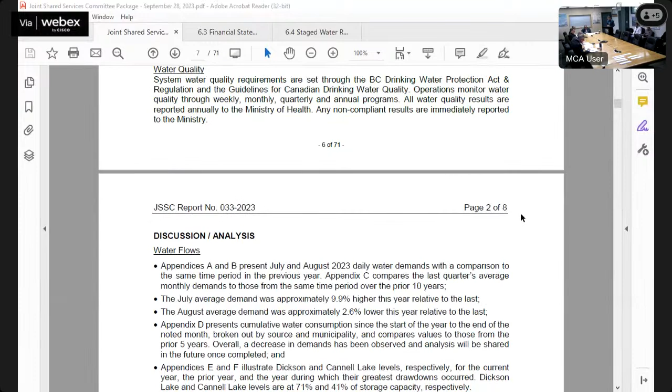Thank you, Chair. I'm pleased to present the bi-monthly water report for July and August of 2023. All water quality results during this period met regulatory requirements for the reporting period. If I could get to scroll down to Appendix A on page 8, that shows the daily demands.

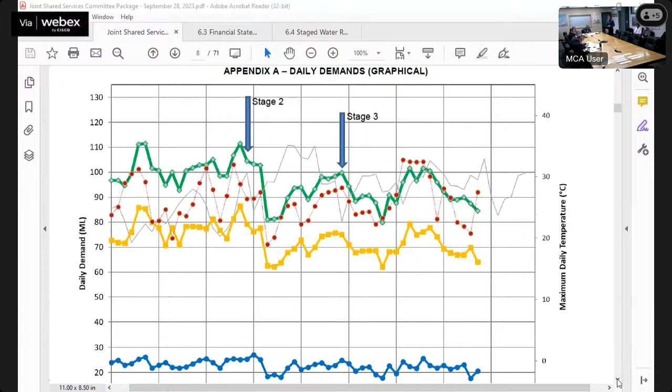We had a peak flow of 111.5 megaliters on July 6th. We also hit that peak on July 20th. You'll notice on the appendix here, I have noted when stage 2 and stage 3 were implemented. You can see some immediate response to those going into place. There will be further information shared with the committee later through Laith when he speaks to that.

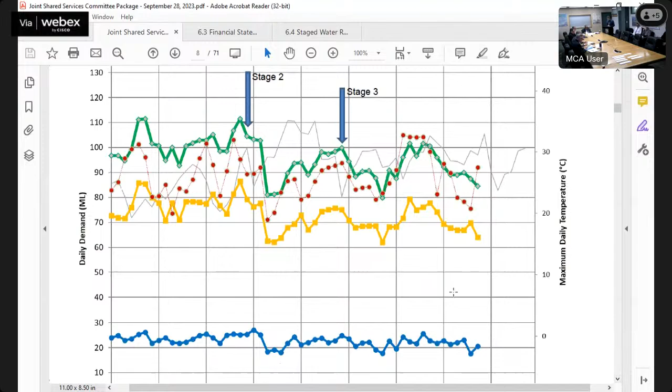Next point would be Appendix C on page 10. This shows the average monthly demands. At the time of this report, July was wrapped up. We were actually up 9.9% in consumption in comparison to the same time last year. August ended up, at the time of this report, down 2.6%.

Just as an update to bring us to where we are today, though, August continued on that downward trend and ended up at 4.6% lower in comparison to the same time last year. And at the date of this report in September, we were actually down by 10.5% in comparison.

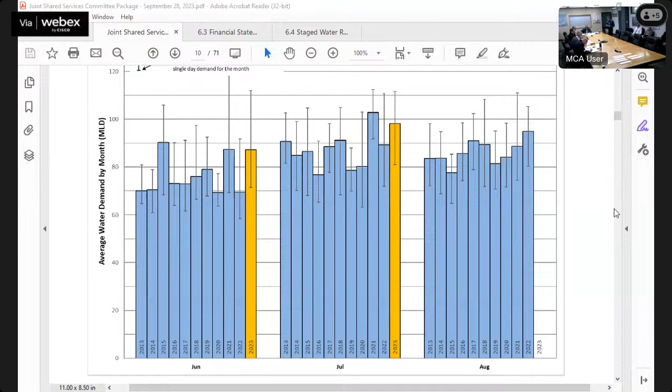Next points of interest would be Appendix E and F on page 12 and 13. This gets us to the lake level, so we'll stop here at Dickson. At the time of the report, Dickson was measuring 71% at the spillway. Fast forward to where we are today, Dickson was down to 64%. Now, to put that into some context, that blue line came pretty much right on the dotted line where we would start to need to pump.

The rain came as of Sunday, and as a result of that, we've actually gone up by almost half a meter as far as volume in the lake goes, just over the last rainfalls we've had. So we are starting to see a bit of an upward trend due to the rain. We are optimistic, however, that's only as good as the rains that do come.

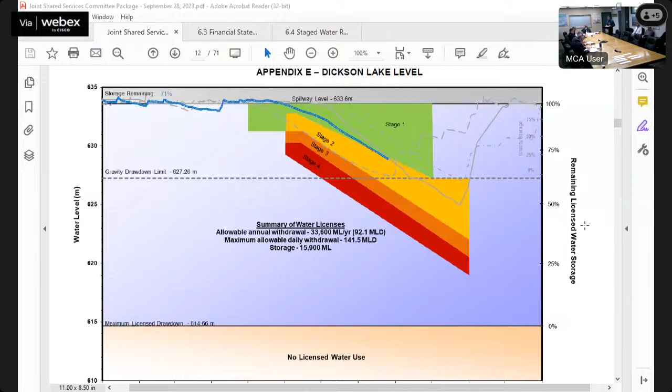The next page, if we go down to Appendix F, that is Cannell. And at the time, it was at 41%. Fast forward to this morning, we were at 31%. We still have quite a bit before we'd have to pump there, and we're actually seeing a flattening curve of the line. The rain is helping, but also we're seeing less consumption for that area of Mission that is supplied by Cannell specifically. And that does conclude the report.

If there's any questions, I'm happy to speak to them. Thank you. Are there any questions? Go ahead, Councilor Gibson.

In terms of conservation, what is the proportions, consistent proportions between commercial and industrial use and residential use?

Through the chair to the councillor, I don't have that information. I know Laith, when he speaks to his report, there is some discussion on that. I believe that might have been in his report as well. That information is available to us for Abbotsford. I'm sure Mission is able to pull that as well, but we're still doing the analysis on that.

Through you, Chair, the reason I'm asking is we're big on conservation, but we're constrained because a number of our industrial sectors are not able to conserve because of the nature of their business and the way they're processing whatever they're doing. So it'd be interesting to look at that paradigm and see what other ways we can conserve without compromising our industrial sector, I guess that's why I'm asking.

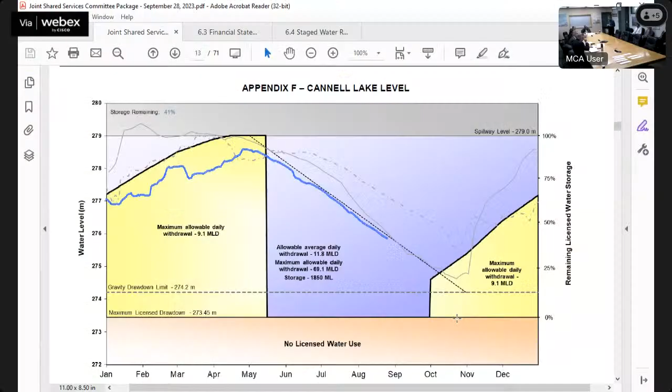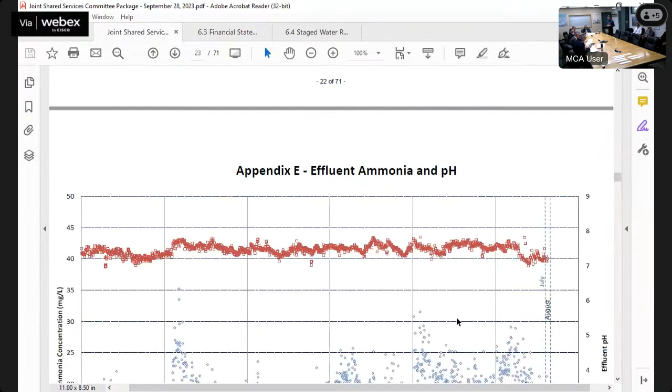We'll go to the bi-monthly James plant report, with Jimmy Austin presenting. Thank you, Chair. I'm pleased to present the bi-monthly James plant report for July and August of 2023. The plant met all regulatory parameters for this reporting period, and as of August 22nd, the date of the report, 4,800 tons of biosolids have left the facility. If we could go to page 24, thank you.

We can see the ammonia concentration, and you can see we're well below the curve. It's a good spot for us to be in, and that is the August result that is present. And that does conclude the report if there's any questions.

Okay, I think it's a good question, I hope my answer was good. No, it's a great question, and I'll put some context to this, to compare ourselves to other treatment plants, for example.

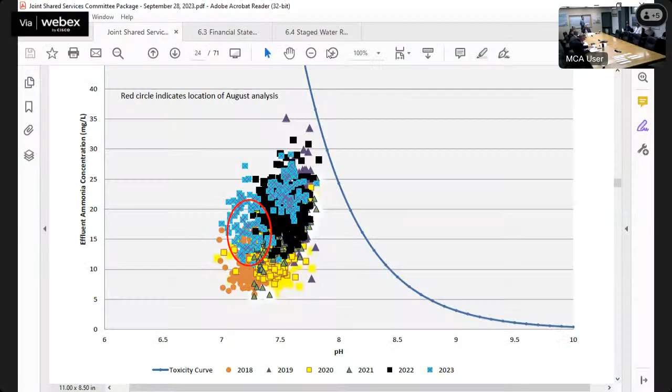So looking at the results to the end of July, I'll start with water operating. The water operating results, we're not seeing any significant variance from budget. As reported in previous months, we did have some repairs earlier in the year that were dealt with, causing a slight negative variance, and the positive variance came in the water conservation area, so a little bit less spent than budgeted there.

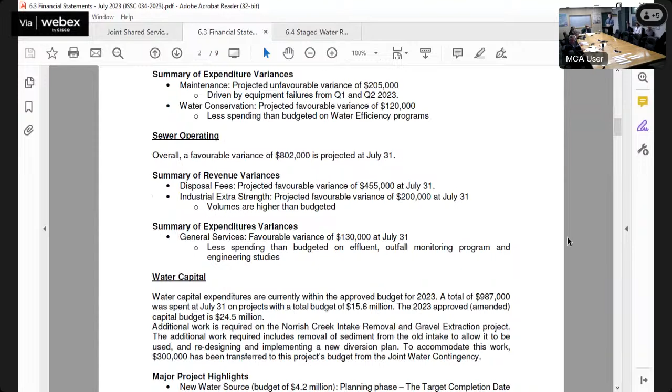On the sewer operating side of things, we do have a significant positive variance, $800,000, similar reasons to what's been presented in previous months. Most of that positive variance is really due to one-time revenues that we're seeing. Unfortunately, that's not something that will continue into next year for the budget, but we are seeing some nice cash inflow this year. On the water capital side, we've spent $1 million to the end of July 31st on projects with total budget of 15.6, and on the sewer side, spent $2.3 million on projects with total budget of $10 million. And that concludes that report.

Are there any questions? Any questions at all? Okay, thank you very much. We don't have recommendations, so we'll move on. Thank you, I don't think there's any issue. Things are going well, can't complain.

Next item, 6.4, staged water restrictions. We have an update on page 34. We have Laith. How do you pronounce your last name? Furatian. Okay, thank you.

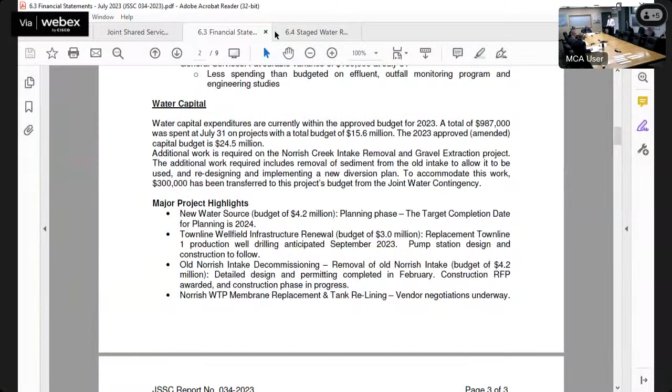Through the chair, I'll just introduce Laith to the committee here. Laith joined us earlier this year. He's a professional engineer, and he's filled our senior water engineer role, which was vacant for many years. He also has a doctorate degree. So go ahead, Laith. Thank you. Okay, go ahead.

So, due to the ongoing drought, we implemented stage 2 water restrictions on July 21st. Two weeks later, on August 4th, those were escalated to stage 3. We also extended the period of water restrictions to the end of October 31st. At this time, staff are documenting the lessons learned, having not been through this type of stage 3 before, for potential refinement to our bylaw and to our approach in general moving forward. Lastly, staff are monitoring the available water resources closely and preparing contingencies accordingly. That concludes my report, thank you.

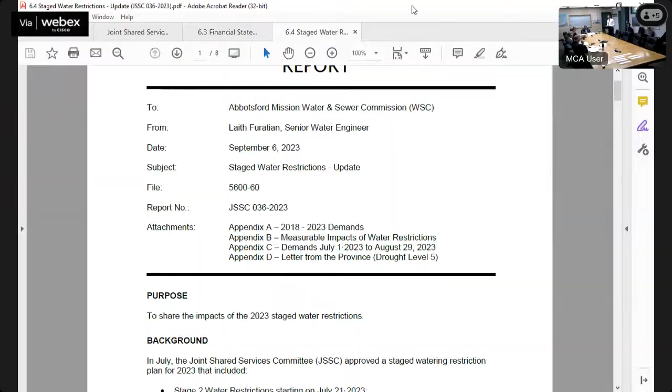Are there any questions? Go ahead, Mayor Siemens. So we have that challenge with the aquifer not recharging. Is the plant along the Fraser an issue that would be of concern there, or is that issue pretty much mitigated? Through the chair, the purpose of locating those wells is to allow recharge of the aquifer from the Fraser. So based on that, and the details of the design, it should alleviate greatly that particular constraint. So it would basically decouple our supply from the Abbotsford Sumas aquifer and basically rely on this other source.

Okay, go ahead, Rob. Yes, just to supplement that too, part of providing resiliency for a water system is looking at our water sources. So we've got some water sources that are recharged at lakes, some are in the Abbotsford aquifer, and in this case, this well beside the Fraser River is coming from another aquifer that is dependent on the Fraser River. So it's about spreading your risks across the municipality, so that if you end up having a fire or something affecting one source, you can switch to other sources. If aquifer levels are down, then you're relying on those other sources. It's about spreading the risk around, as well as where you're getting your water from, because you could end up having, as we've seen before, a landslide on Norrish that takes out the transmission main, and now you're relying on your other sources. So it's spreading your sources out, different sources of water, and that improves your resilience.

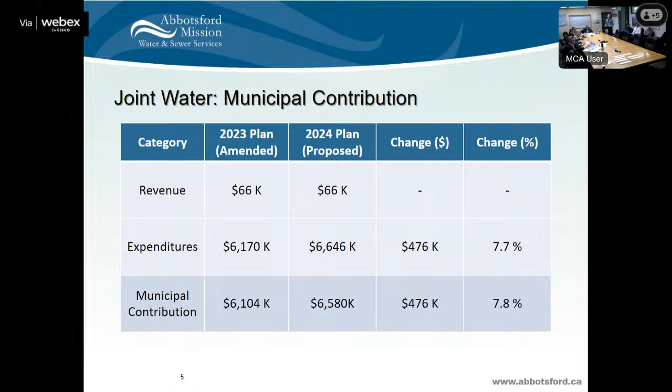Starting at joint water, we don't have any recommended changes to the revenue budget, but for the expenditure budget, we're looking at a $476,000 increase. That's broken down on this slide here.

Similar to last year, we've got some challenges with property insurance, a 58% increase over the budget for last year. So $195,000 is the single largest pressure we're facing. We also have a new water planning engineer included in the general services area at $166,000.

We had some challenges with our security for the water plant, having to replace that midway this year, and are facing significantly heightened costs, built into next year's budget at a cost of $130,000. The water conservation item at the bottom is just a one-time item that fell off the budget as we moved from 2023 into 2024.

If we look at the municipal contribution over the next 5 years, I've explained the difference between 2023 and 2024. It's relatively flat for the other 4 years, with the exception of moving from 2026 to '27, and that's where we've incorporated some provision for operating costs for when we have the new water source come on stream.

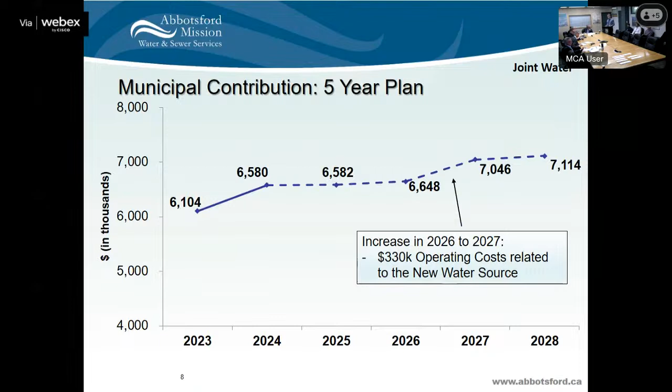Moving over to joint sewer, again, no proposed change to the revenue budget. That increased revenue we're seeing this year is due to one-time causes, so we're leaving that flat. The expenditure budget has a $336,000 proposed increase, and I've broken that down on this next slide here.

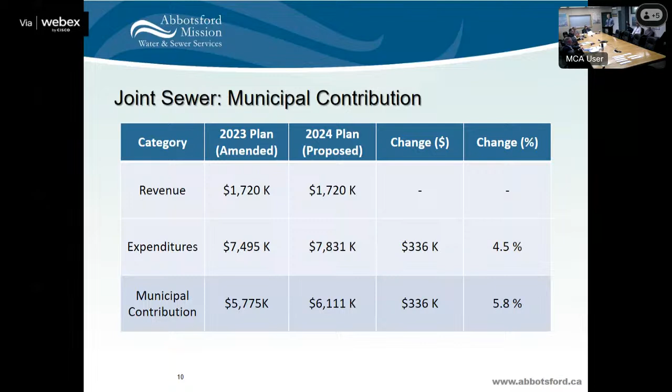Once again, property insurance is the story here, so $390,000 increase in that area. We've made some adjustments for salaries and benefits. On biosolids management, a slight decrease there, because over 2022 and into the first part of 2023, we were experiencing some fuel and route delay surcharges on the contract costs for that particular function. Those have gone away now, and we expect that to persist through 2024, so that explains the difference there.

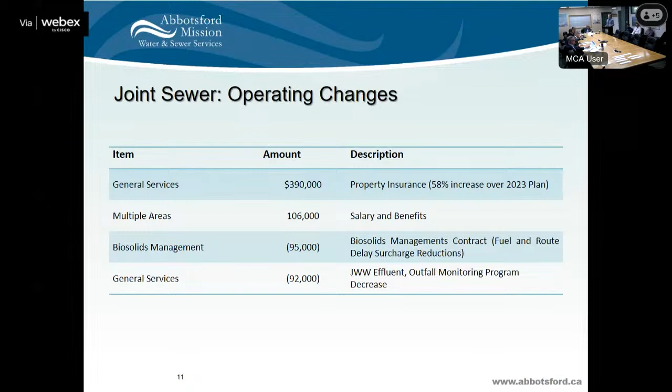The last item, the outfall monitoring program, is a line item in our budget that tends to fluctuate from year to year depending on requirements in any given year, and that will have a decrease of $92,000 moving into 2024.

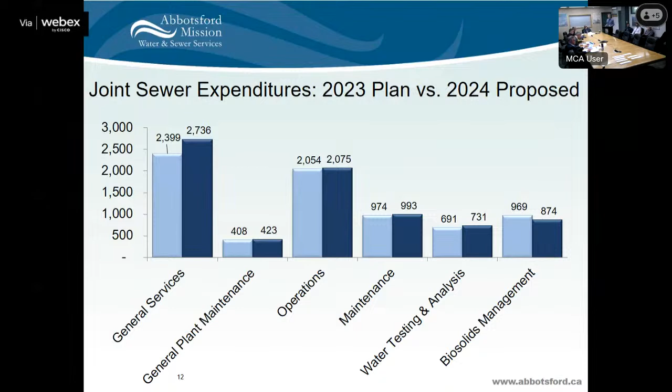The municipal contribution for 5 years is relatively flat. The main item there is the increase from '23 to '24, and I've covered the reasons for that one.

The $10 million in year one is for design. The $71.4 million in 2025 is for the commitment we'll have to make to construction at that time, although the actual expenditure of those funds will be phased over a couple of years, 2 to 3 years. I'll also mention that $81.4 million will be funded to a large extent, about $63 million, by a grant that's been received for that project.

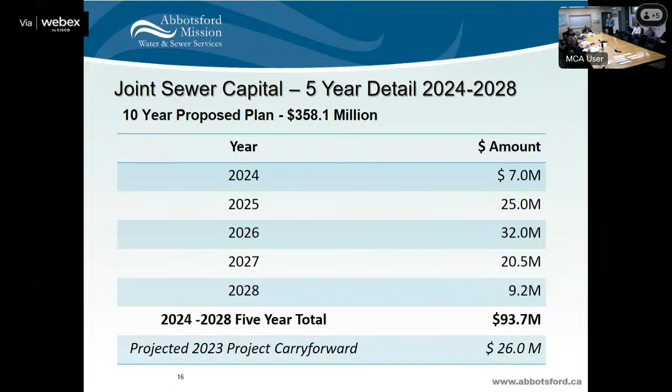So in summary, on the operating side of things, the joint water contribution is planned at 6.6 million, sewer at 6.1, and then the 5-year totals for capital, joint water 106 million, with over 80 of that being the water source, and then joint sewer at 93.7.

So the recommendation here is that the committee authorize staff to include the operating and capital water and sewer financial plans with the City of Abbotsford and the City of Mission's draft consolidated financial plans as required. It is a recommendation. I'll put it on the floor before we take questions.